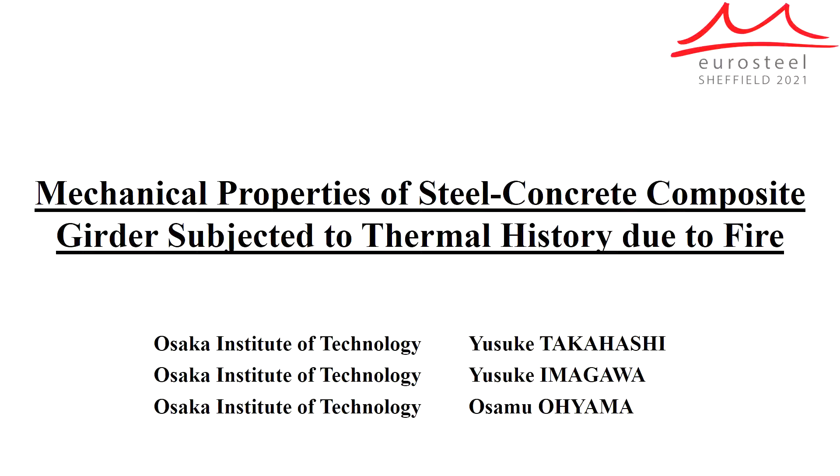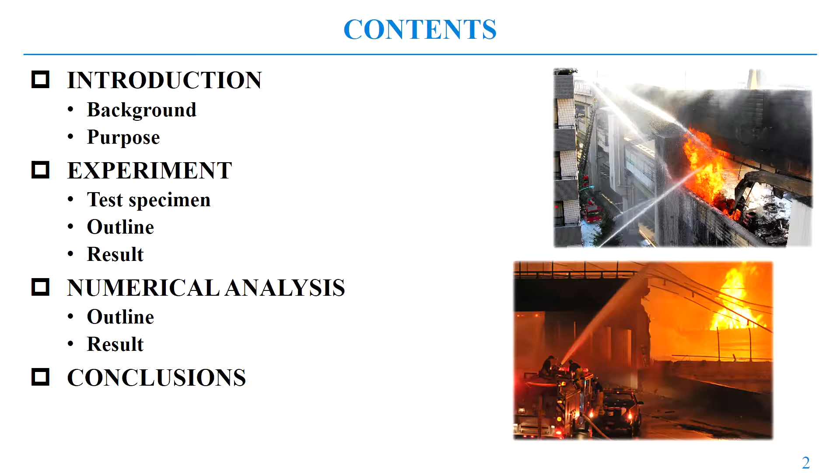Such damage has been confirmed in bridge investigation after fire. In previous research, experiments and analysis have been executed to establish the behavior of steel girder during fire. However, there are few researches on behavior of the steel girder after fire. Hence, it takes time to investigate the passing probability of the damaged bridge from fire. Therefore, it is necessary to understand the influence of the strength reduction after fire on the structural characteristics of the steel girder bridge.

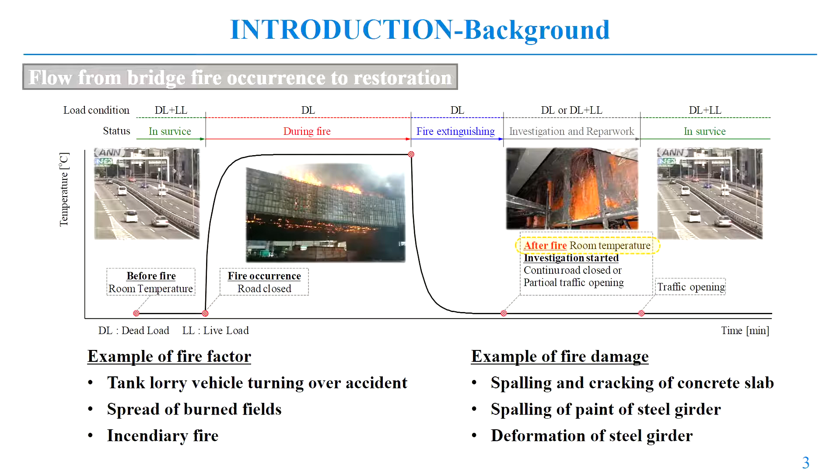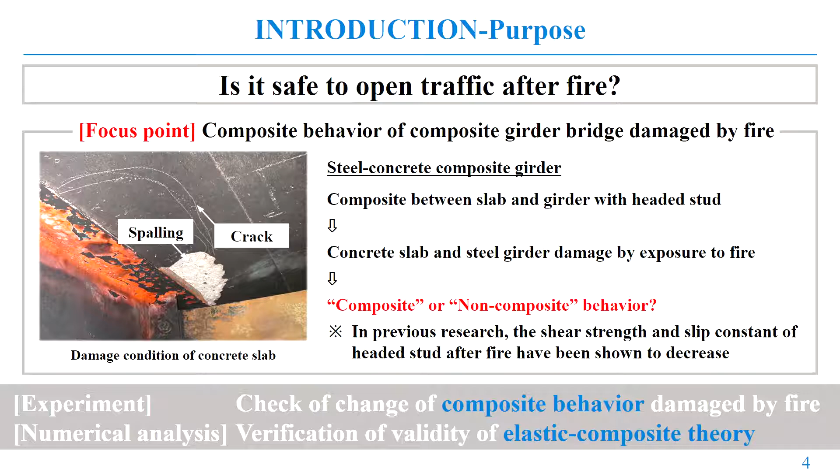Please look at this picture. This picture shows damage condition of concrete slab. Such damage of the bottom of concrete slab is often confirmed in damage investigation after fire. The concrete slab and steel girder are composited with headed stud. However, this damage may decrease the degree of composite. Therefore, we focus on the composite behavior of composite girder bridge damaged by fire. The purposes of this study are to clarify the change of composite behavior damaged by fire, and to verify elastic composite theory as analytical method after fire.

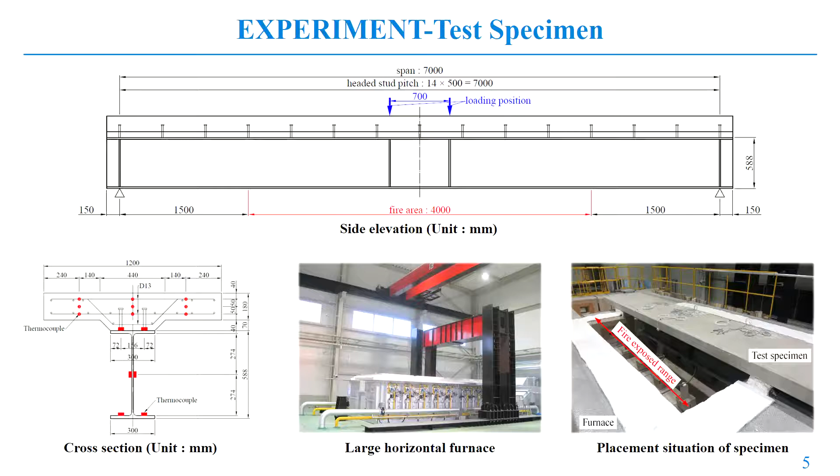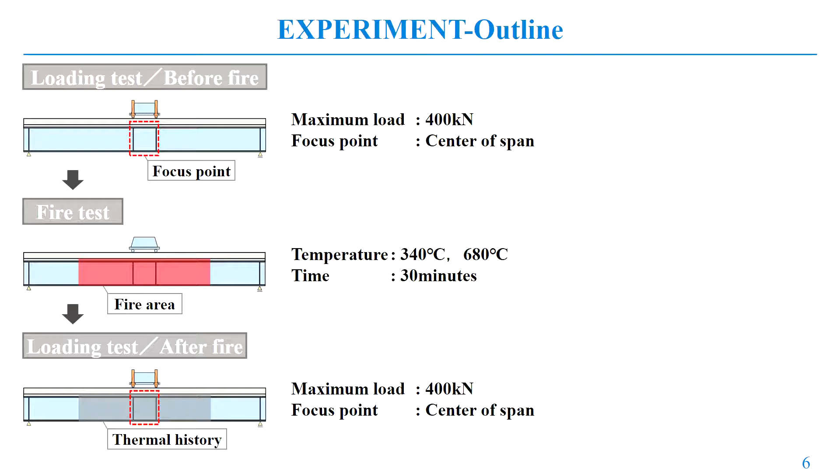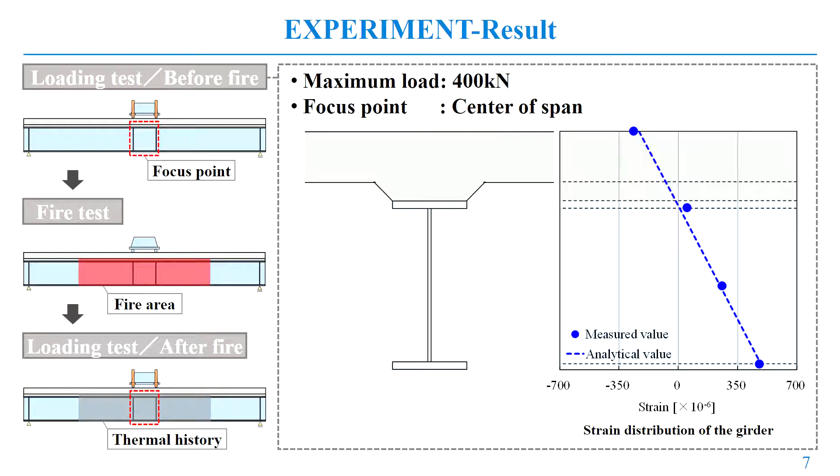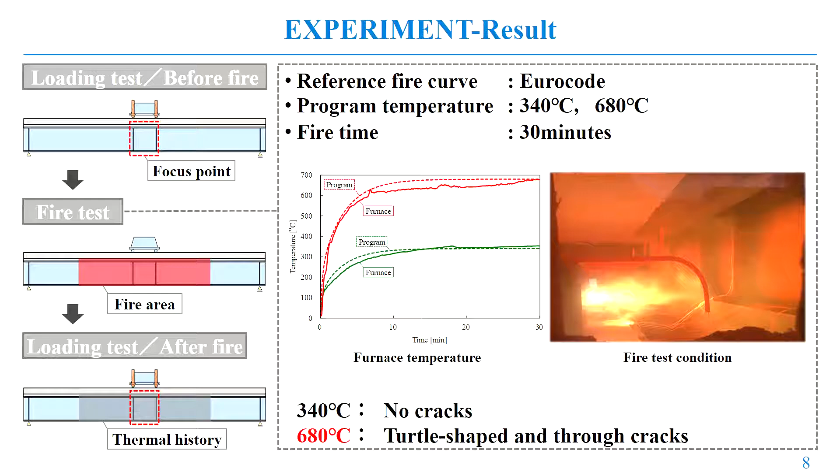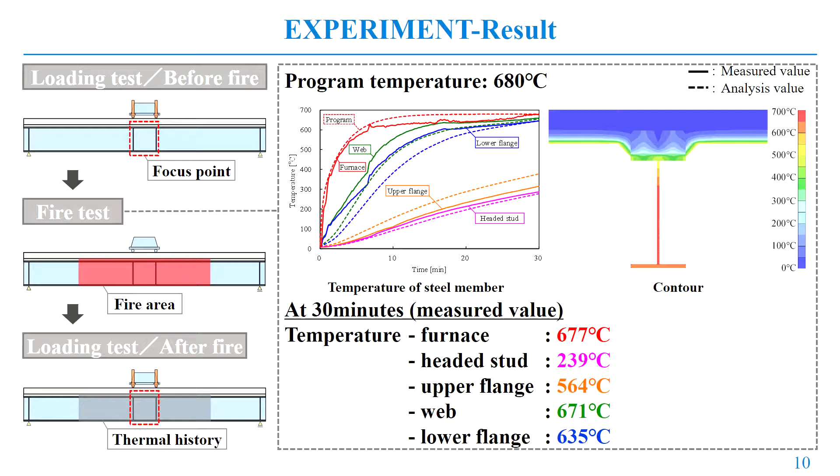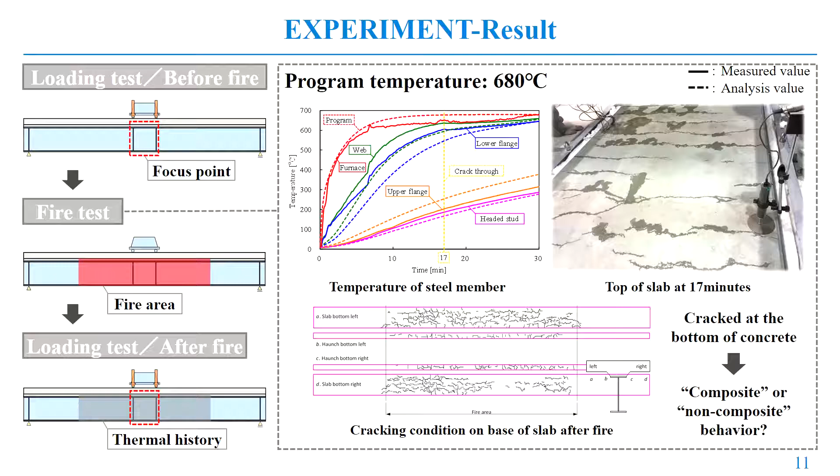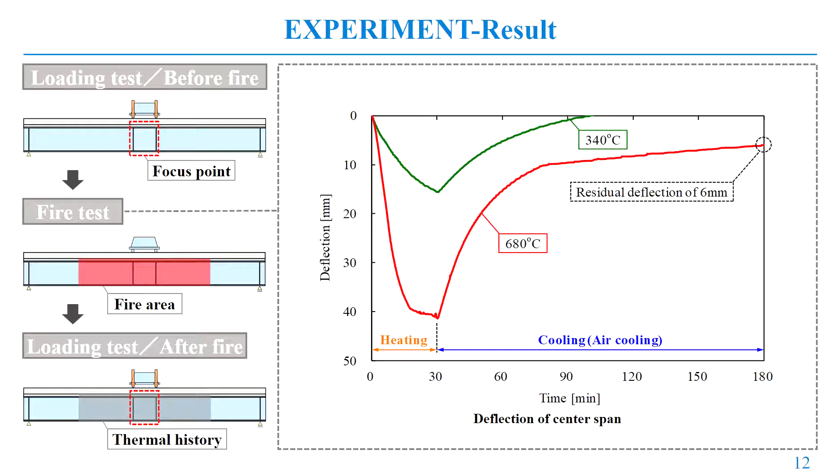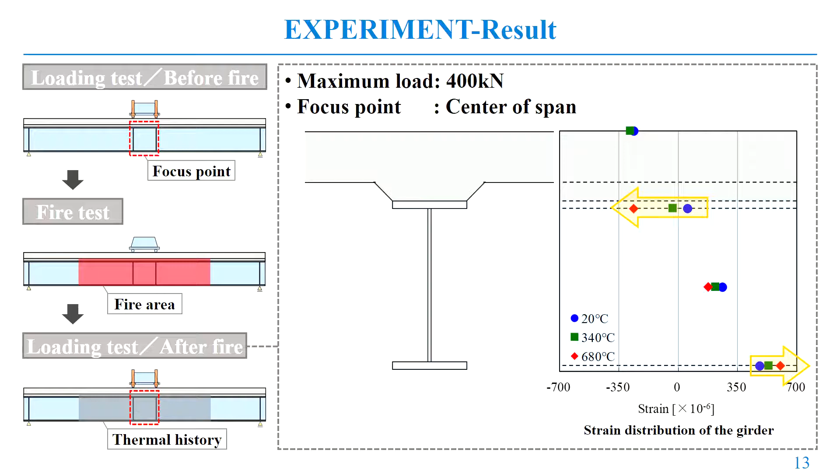This slide shows the results of static loading test after fire. As you can see, the strain distribution was almost the same as the room temperature at 340 degrees Celsius. On the other hand, the strain distribution tended to approach non-composite behavior at 680 degrees Celsius because of the decrease in rigidity due to cracks that were generated in the concrete slab. So I've told you about results of the static loading test after fire.